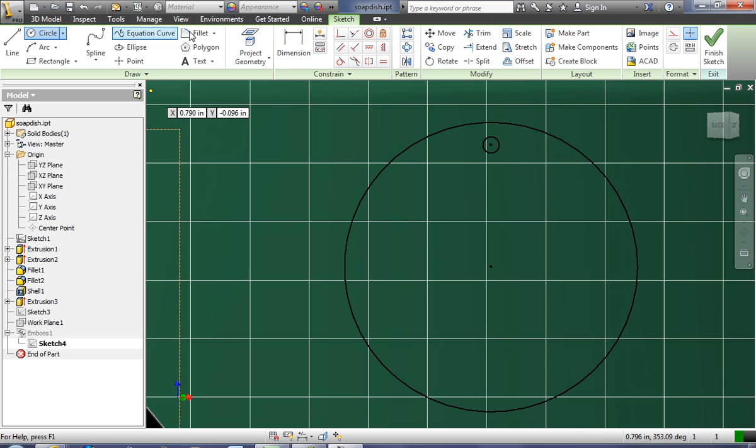I'm going to edit that sketch, and I'm going to put a circle, a very small circle, right here. You'll notice I can line it up directly perpendicular to the center, and put it right there. I'm going to dimension it because I'm going to be putting a series of these circles, and I want them all to be the same size.

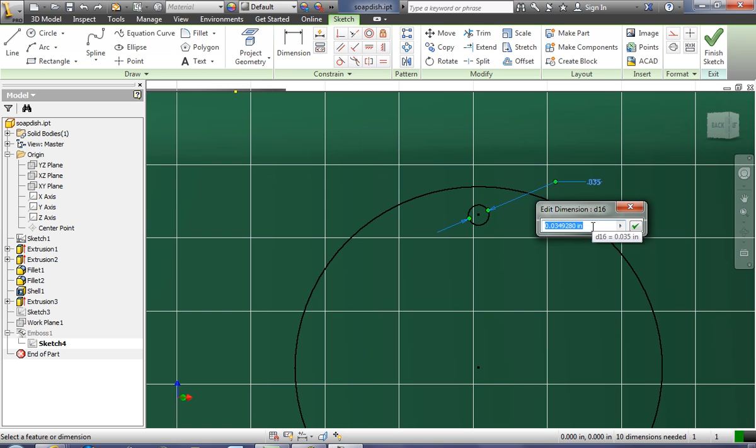So let's make it 0.03. That wasn't good. Didn't like it, oh there we go. Okay, 0.03, well, 0.035 I guess. 0.035.

I'm going to, you know what, I'll draw a line here. No, I don't need to draw a line, just keep drawing these circles. There's one circle. I'm going to line up the center of that circle straight down, right here. I'll dimension that to 0.035. I might be able to draw it exactly... no, I can't. I'll draw one more here, and then maybe one more.

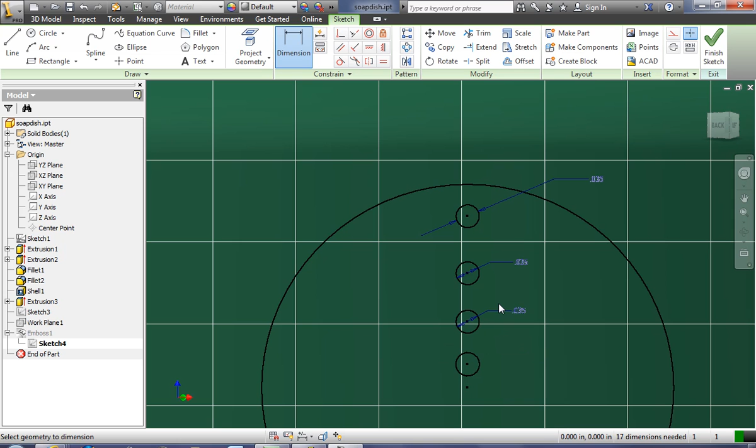Okay, so I'm going to dimension these now, 0.035. I'm only selecting 0.035 because it's close to the size that I drew. I drew it close to the right size, and that is a good tip for you when you're drawing something: always try to draw it close to what you want it to be.

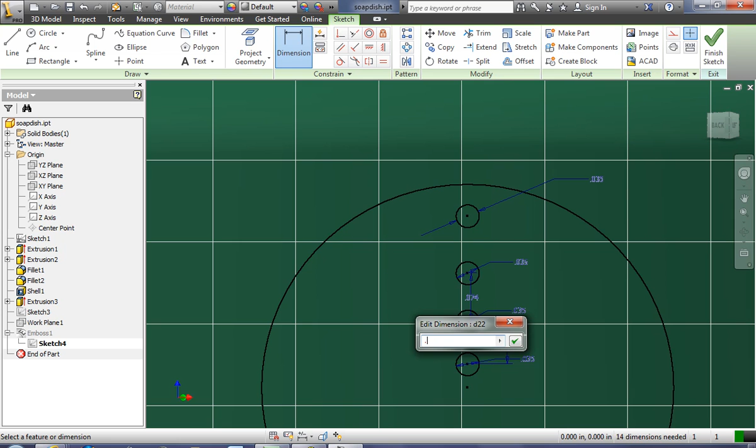Even if you can't get it exact, you can get it close, and that way if there are modifications that have to be made to the shape, they'll be very minor. I'm going to dimension between these, from here to here, center to center. It's 0.065, so I'll make it 0.065. Now this one, 0.065. And this one, 0.065. I think I have room for one more, maybe not, it'd be close. I'll just leave it at that.

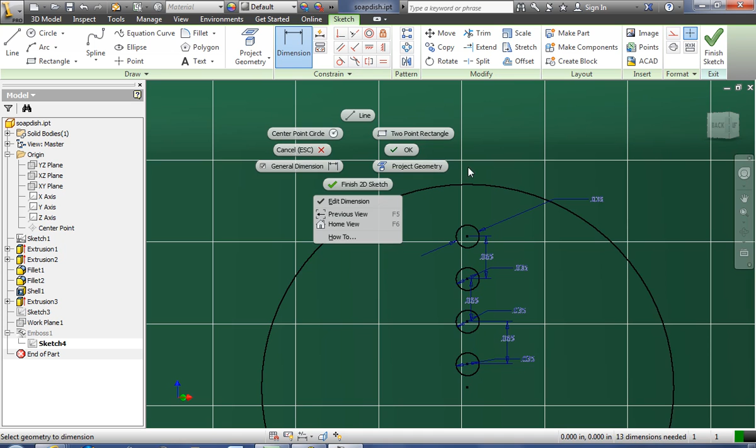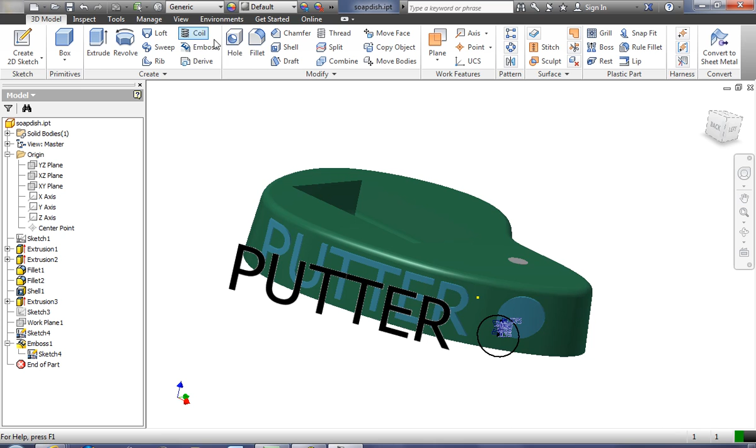All right, so now I'm going to finish my sketch. And what I'm going to do now is share that sketch, because even though I put it on the sketch, it's not embossed yet. So I'm going to share that sketch, and now I'm going to emboss those 4 holes, that one, and emboss these a little bit.

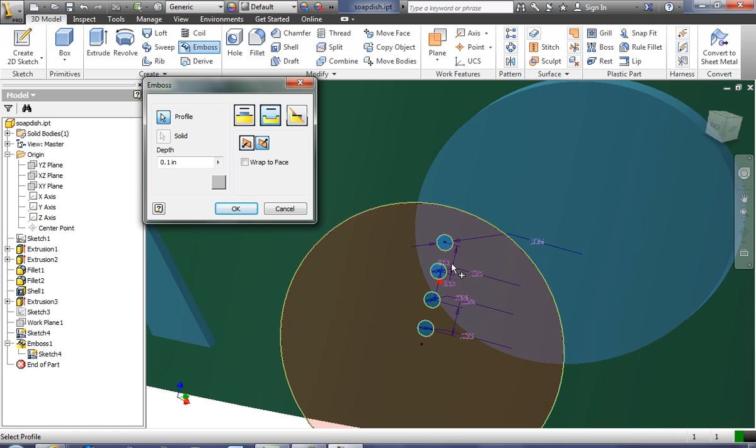Now, you saw how the last emboss was an extrusion from the face. This emboss is going to be a cut, and the face that it's going to emboss onto is this face, I believe. So let's see if it works here. I want the cut to be very, very small, 0.01.

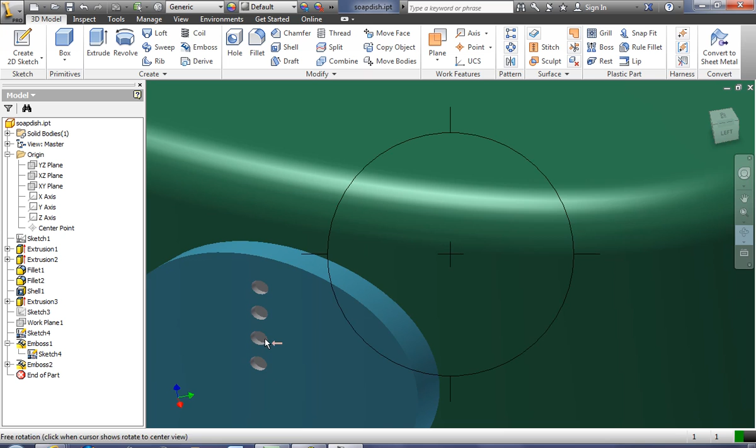Let's see how this looks. It's going to cut a little bit into the face. And I think that's exactly what it did. You see that? These are simulating my divots.

Now what I'm going to do is a circular pattern. A circular pattern is found over here in the Pattern tab, the middle one. We're going to select that feature right there, and rotate it around this axis. I want more than 6, I want 20.

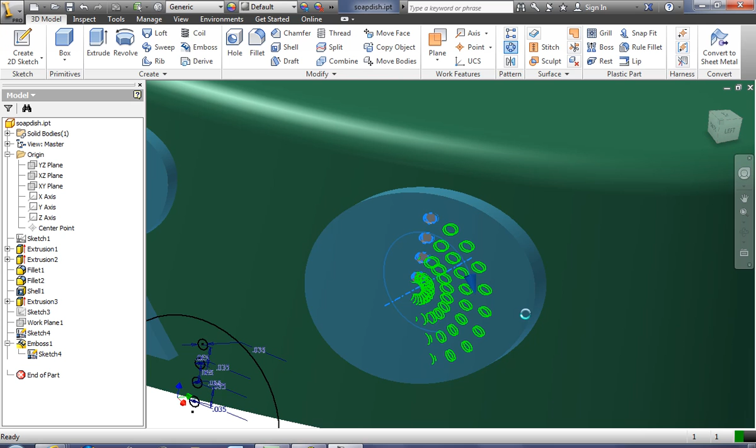Let's see if this works. As I got closer and closer there, it's overlapping. It might not like that. I don't think I'm going to like it. Yeah, see, I don't like that. Not good. Back. All right, let's see.

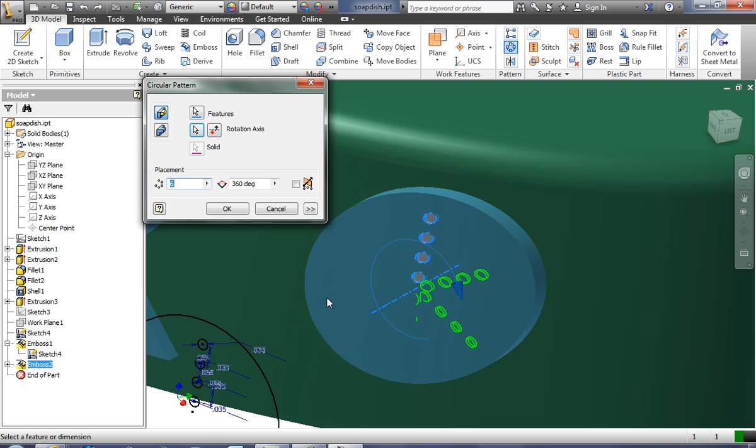Try that again. So let's do a circular pattern of this feature around this axis. But the problem is it's coming in and out because that axis is not straight, it's on a different plane. Yeah, this was not a good idea.

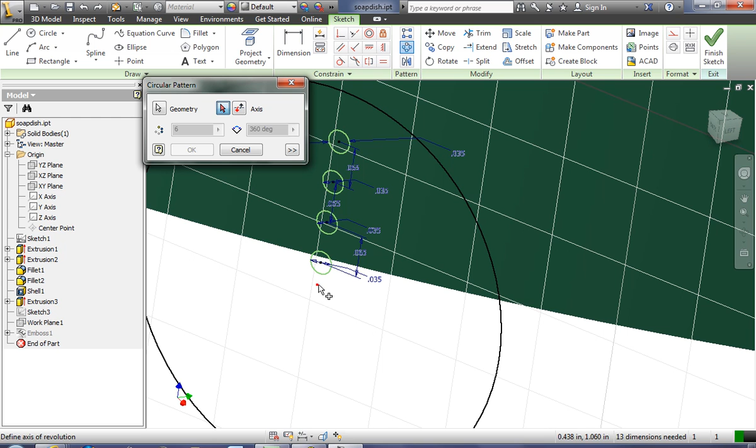I'm going to, you know what I could do though? Here's what I can do. I'm going to go back to my sketch and do a circular pattern of this. And then I can emboss, okay, and the axis will be right there. There we go. That's what I want.

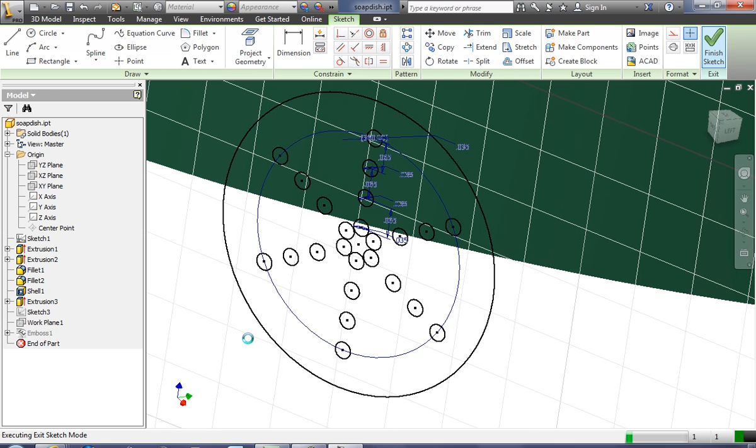All right, so you see what I did? I did a circular pattern on the sketch so that now when I finish my sketch, I can emboss all of those circles at the same time onto the ball that's on my emboss. So I'm going to go back here, share the sketch again, and now I'm going to emboss all of those circles. I'll just select all of them.

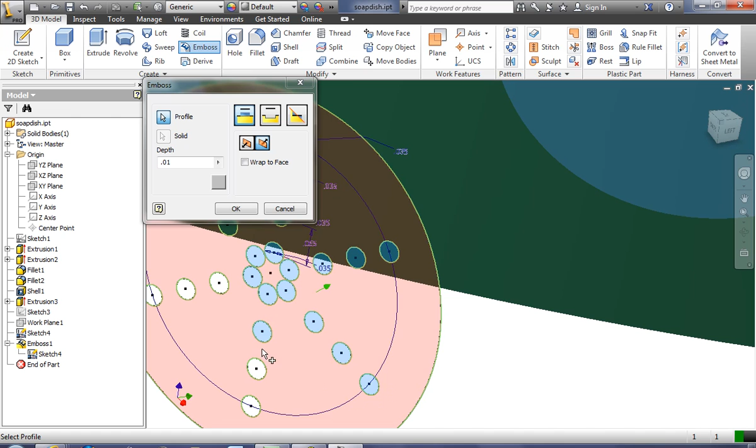Okay, a little tedious, but probably worth the effort. Give you a little bit of detail.

Whoops. If you select something you don't want, you can hit the control key and then deselect it. Do you see that? I didn't want that whole circle, I just wanted the little circles inside. So I selected it by accident, hold the control key, and then select it again, and it deselects. Okay, that's a really good thing to know.

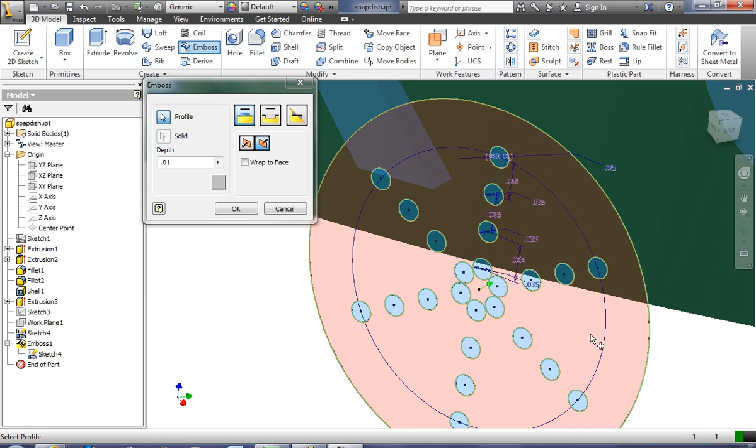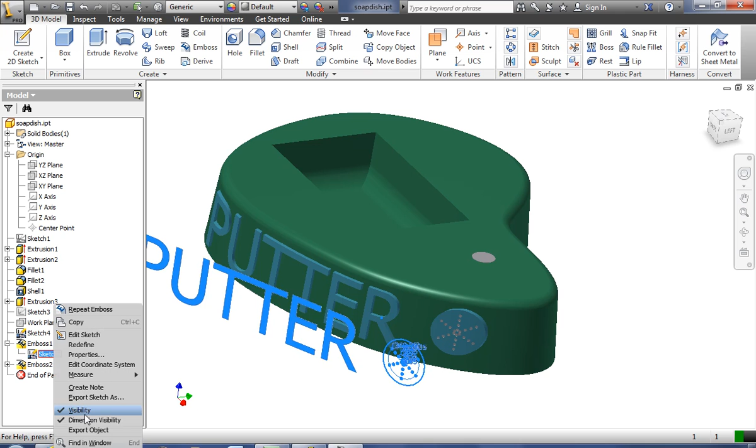All right, so I'm selecting all these circles. I think I've got them all. And I'm going to change this to 0.01. I'm going to make it a cut into the face of that ball. And I'll say OK. And those circles should pattern themselves onto the face. That's pretty cool. All right, and I'm going to turn the sketch off, turn the visibility off, and voila, you've got yourself some really good detail.

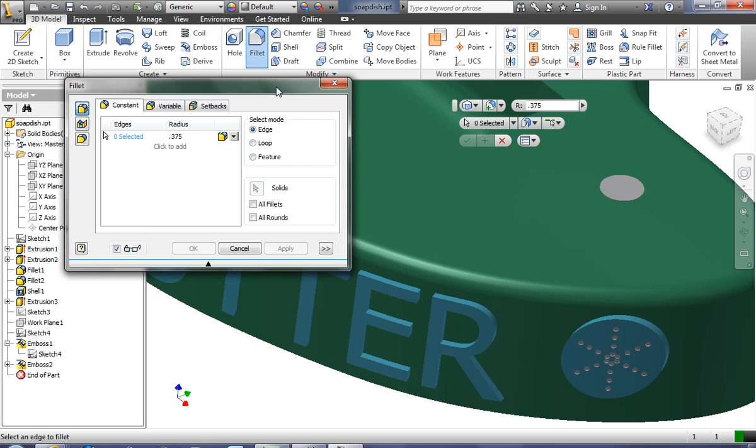So feel free to come into your emboss. For example, I don't like these sharp edges on here. How do we get rid of sharp edges? Well, we use a fillet. So the fillet tool, I don't want to just fillet the edge. I want to fillet the entire feature.

So I'm going to select it, and I'm going to select a very, very small radius of 0.002. It should give me a preview. I can actually make it bigger than that. Let's make it 0.005. More, 0.01. I think that'll work. And say apply.

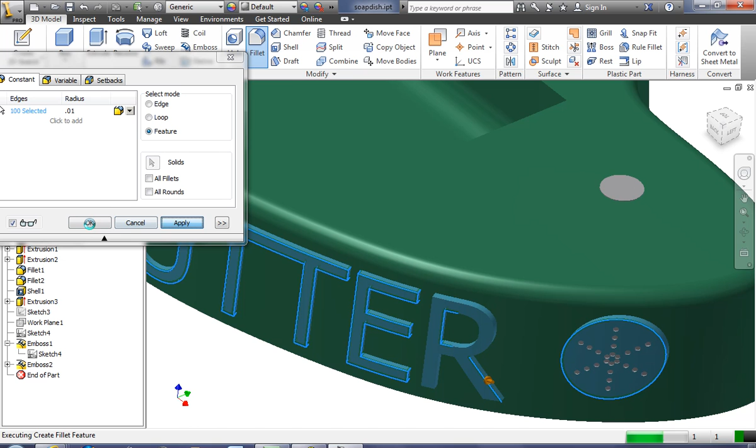Now it's going through there and it's trying to round all those edges. It didn't work. See, this is what happens when you attempt something and it doesn't like it. It gives you an error message like this. And this error message will tell you exactly what's wrong. It says try adding more edges or making a smaller radius.

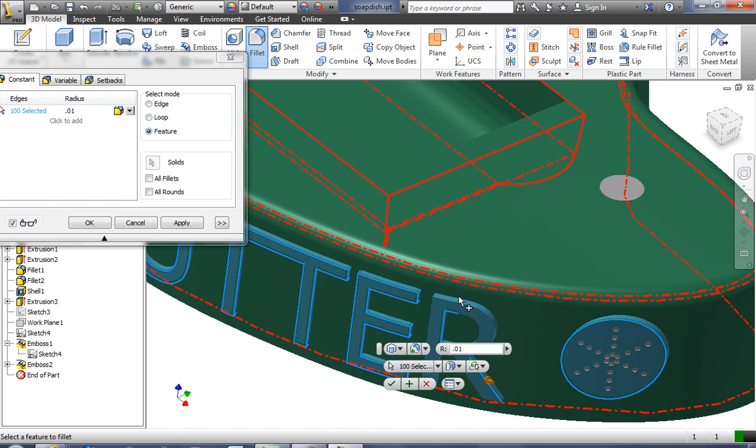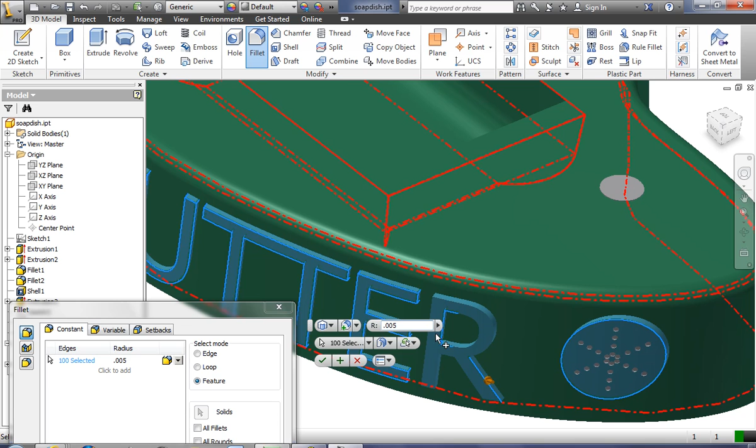So we're going to select edit and we're going to do a smaller radius. So we've got the entire feature selected. I just want to try it again. So fillet. I want to do a feature. The feature is going to be the emboss, and the size is going to be 0.005. Let's try that.

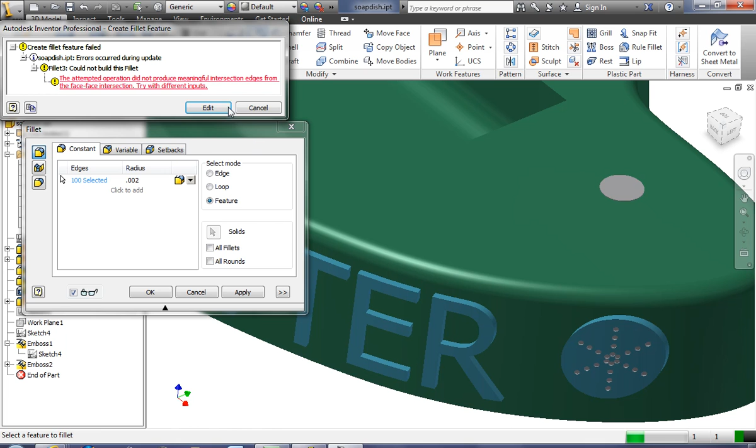Apply. And we'll see if that's going to work. Remember I told you before, if your fillet doesn't work, try a smaller radius. Let's try 0.002. It might not do it. Nope, it's not going to do it. All right, we'll cancel that.

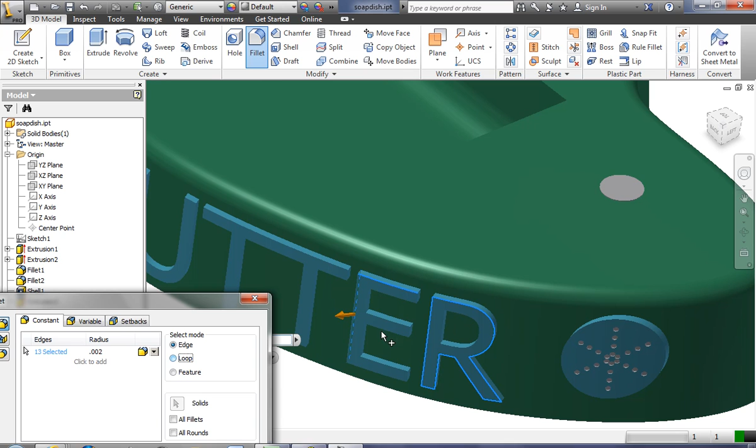Let's try something else. Let's try to do a loop. So if I can fillet that loop right there, that outside edge, or we can select edge too. If you do edge, it only selects that particular edge. See that? If I select loop, it will select everything that's connected to that. See? Fillet the loop.

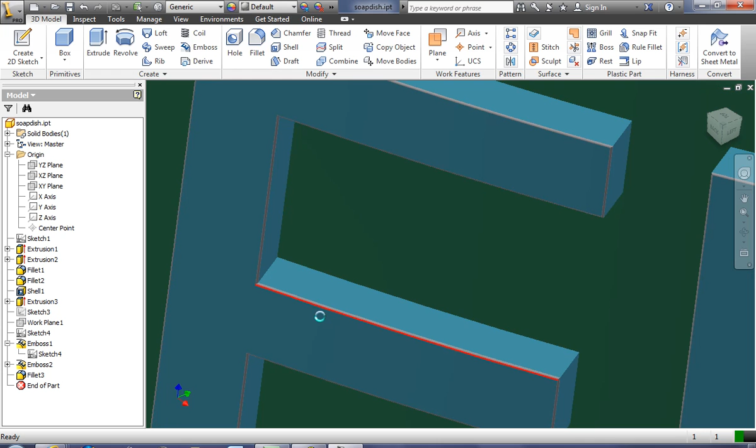0.002. Let's see if it does it. Yeah. See, well, see how small that fillet is? It's very, very small. I'd like to make it bigger.

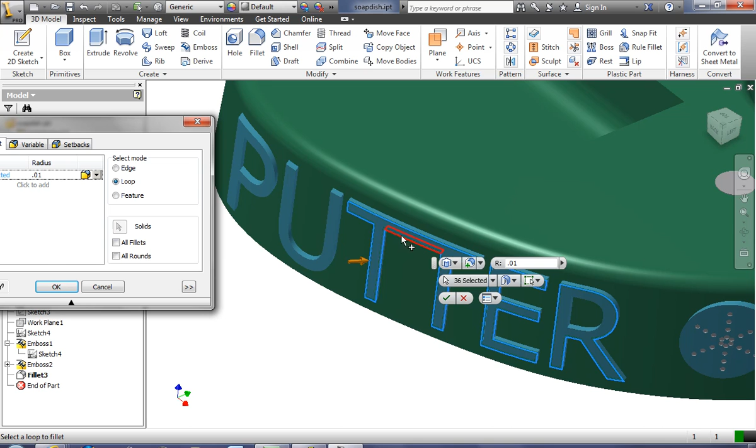So what I'm going to do is I'm going to go back to the fillet and I'm going to edit the feature. And now I'm going to change this. It's too small. I'm going to change this to 0.01. And I'm going to keep the loop command, and I'm going to select more faces, more edges. See that? The loop. So it's going to loop that one. I'm going to select this face here, that edge. I'm going to select this face here.

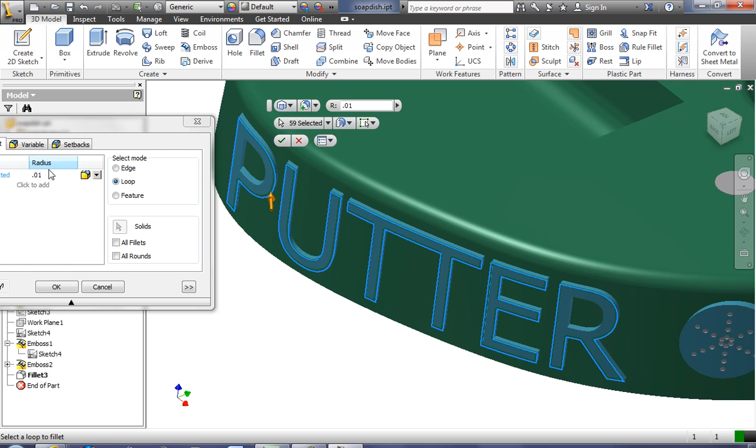You see, with the feature command, it's going to try to round off every single edge, and it didn't like that. But with the loop, I can select just the outside edge, and I can see by the preview that it's still rather small. Let's make this bigger. Let's make it 0.05. Now it's looking better. See how it's rounding it off?

Now I don't want to go too much, but I think that might be okay. Let's give it a shot. You'll see that when you really get down to the details of this, see, it didn't like that. So let's go ahead and do a smaller, let's do 0.03.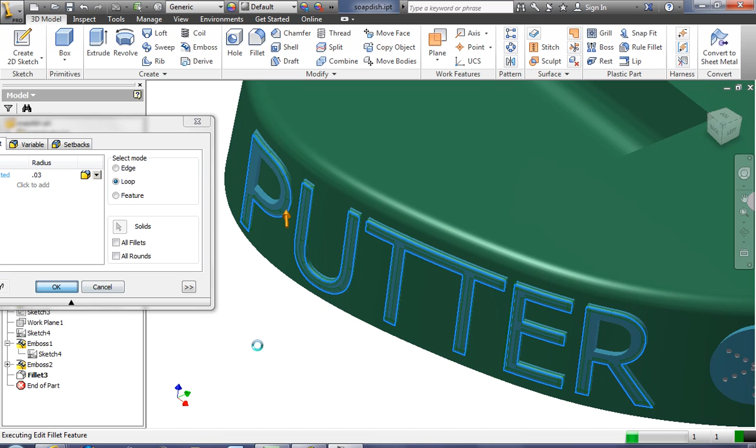This is the tedious work that needs to go into this if you want to do things right. And if you really want to put some fine detail on your drawing, you need to spend some time. There we go. That worked, I think. Yes! And you see that? Look how much nicer that looks. Doesn't that look much nicer? It's more round. I could probably put a fillet on this edge too.

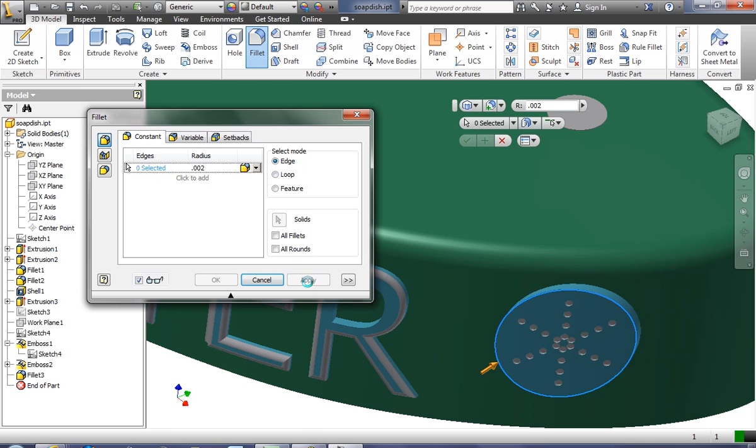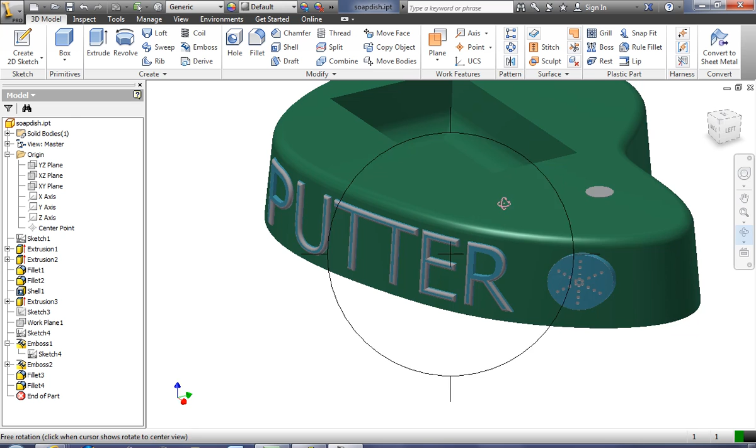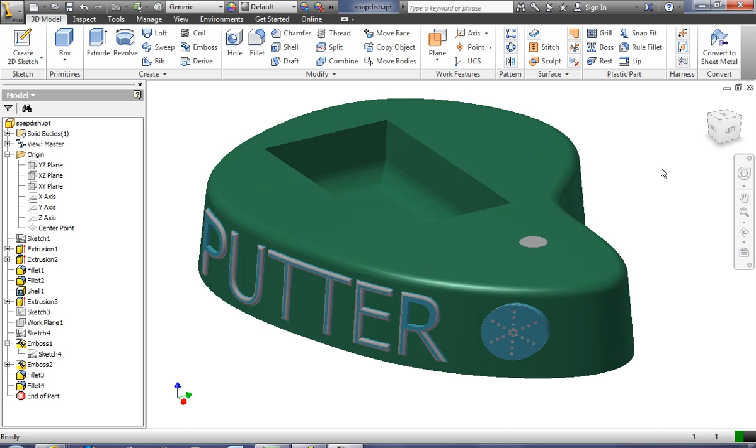Let's try that. But my point is that as you go through here, let's select the loop. As you go through here and you do this kind of work, it's going to take some time if you want to get things looking really, really detailed. So don't just think you have to blow through these assignments. You need to spend some time, take your time, and work on the detail of your fillets. Work on the detail of all the parts that you have. Spend some time doing it, so that you have a decent looking project. If you just blow through it, and you have sharp edges, and extrusions popping out, it's obvious that you didn't take much time to think about it. So do your best and work on the details of your embosses, your fillets. And in the next lesson, we're going to learn how to